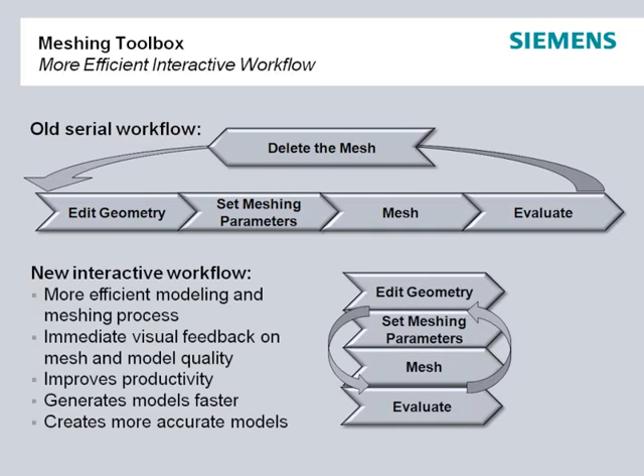In this video we'll be looking at the new Meshing Toolbox Geometry Editing Tools. The unique features of FEMAP's Meshing Toolbox are that all of the tools are interactive and can be used interoperably, which makes the process of preparing and creating the finite element model much faster and easier. Here we'll look at the Geometry Editing Toolbox and see how it can be used with some of the other tools to modify and improve the finite element model.

The Geometry Editing tool in the Meshing Toolbox includes a surface splitting capability designed to help prepare and organize geometry to improve the finite element mesh. In this example, we'll split a couple of the surfaces to make a better arrangement for the mesh. The resulting mesh updates automatically when the underlying geometry is modified.

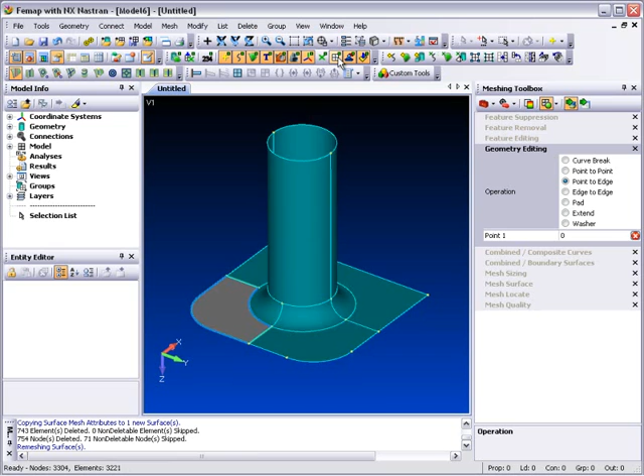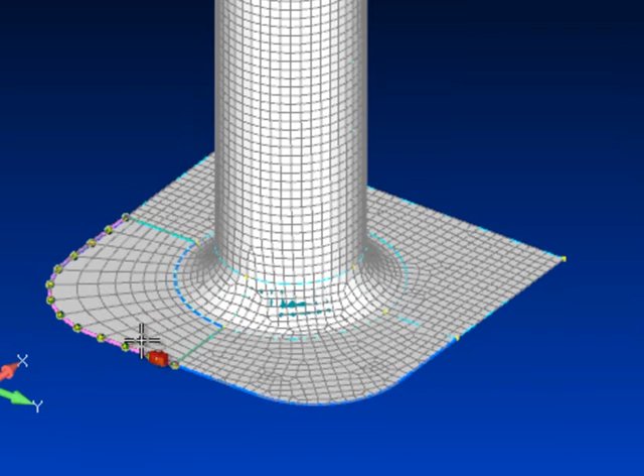While preparing the model, you can also use tools in the Meshing Toolbox in combination, and here we're now using the composite curve capability to clean up the model further by eliminating multiple curves on the edge of a surface. Then, in the Mesh Sizing toolbox, we'll change some of the edge mesh sizes to improve the mesh on a couple of the surfaces, allowing a mapped mesh to be created comprising more regularly shaped elements.

The ability to extend surfaces is now part of the Geometry Editing tool, and we can review this capability by looking at a typical weldment model. All the components are actually separate individual parts that do not connect, and that are intended to be seam welded together. FEMAP can connect these separate parts together easily, even after meshing.

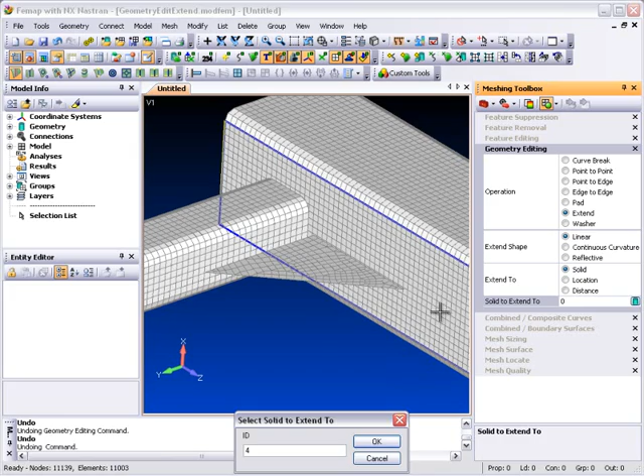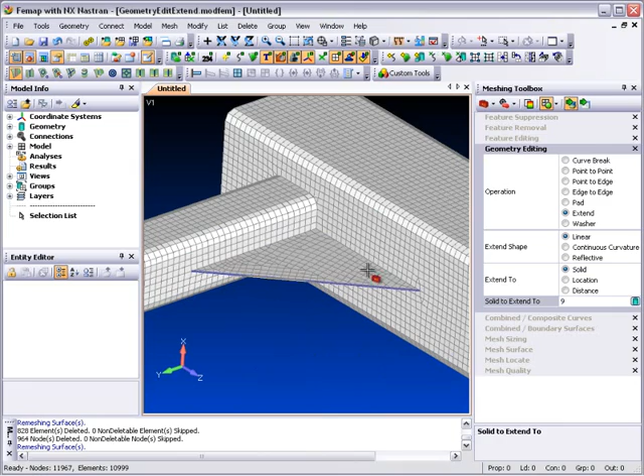Using the Meshing Toolbox Geometry Editing tool, the frame components and gussets can be connected together into a contiguous finite element model. The surfaces of the separate components are extended to meet the adjacent solid part to which it would be welded in reality. In the process of connecting the surfaces up in this way, the overlaying mesh of the extended part is automatically updated and connected to the mesh of the connecting part. As a result, all gaps between the components are eliminated, creating a continuous finite element mesh for the whole model.

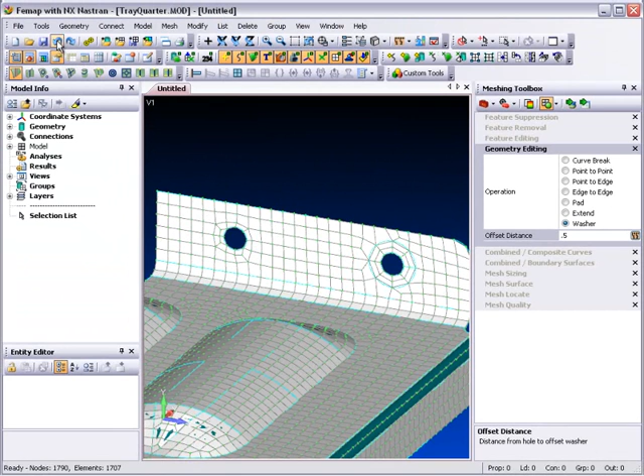The pad and washer features that can be used to place well-shaped elements around stress raisers such as holes are now included in the Geometry Editing toolbox. This allows them to be applied to a meshed model interactively as part of the model preparation process. Again, the mesh updates automatically when the pad or washer is applied.